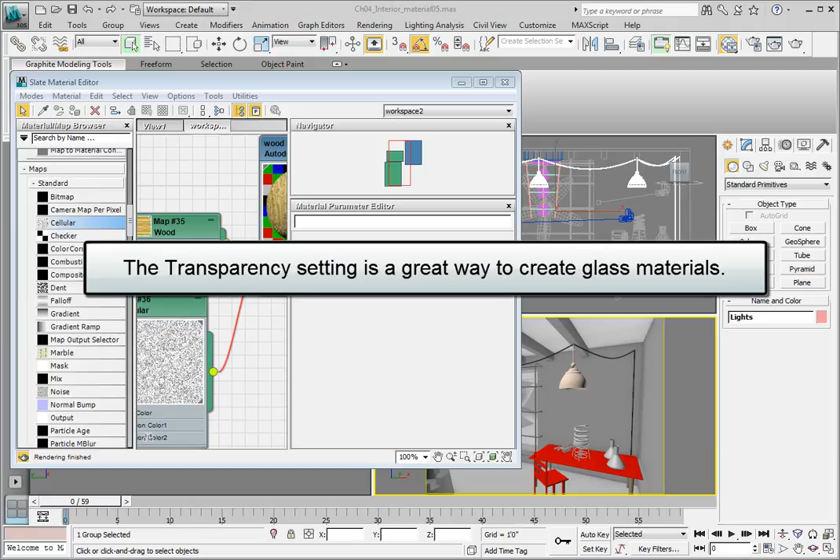Another important material attribute is transparency. The transparency of the material can be set to make objects ranging from flat planes of glass and thin glass materials like the beakers that we have in the scene to leaded crystal and colored solid glass objects.

If you're continuing from the previous section, then you don't need to do anything special. However, if you're starting from a new scene, go ahead and open the file Chapter 4 Interior Material 05, then open the Slate Material Editor to continue with this lesson. Let's go ahead and make some glass material for the glass beakers and the other glass objects that we have on the table on the right-hand side of our laboratory.

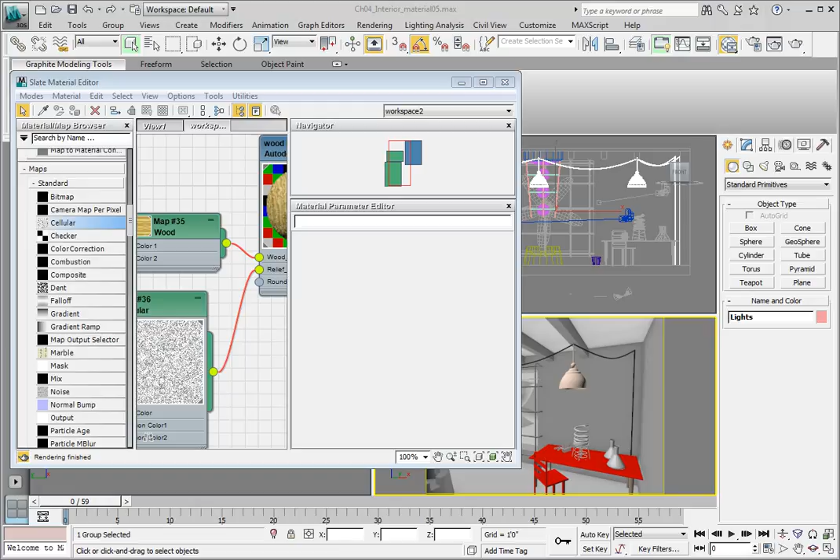In the Slate Material Editor, we have our active work area available. We can click the middle mouse button and pan the work area down so we give ourselves some room to add another material into the workspace. This is another unique aspect of the Slate Material Editor. Each workspace can contain multiple complete materials. You're not limited to just having a single material in the workspace.

Scroll down in the Material Map Browser until we get to the Arch and Design material in the Mental Ray rollout. Let's go ahead and click and drag that out onto an open area in the workspace. Double-click on the material title bar to expose the material attributes, and we can double-click on the material preview to give us a slightly larger preview.

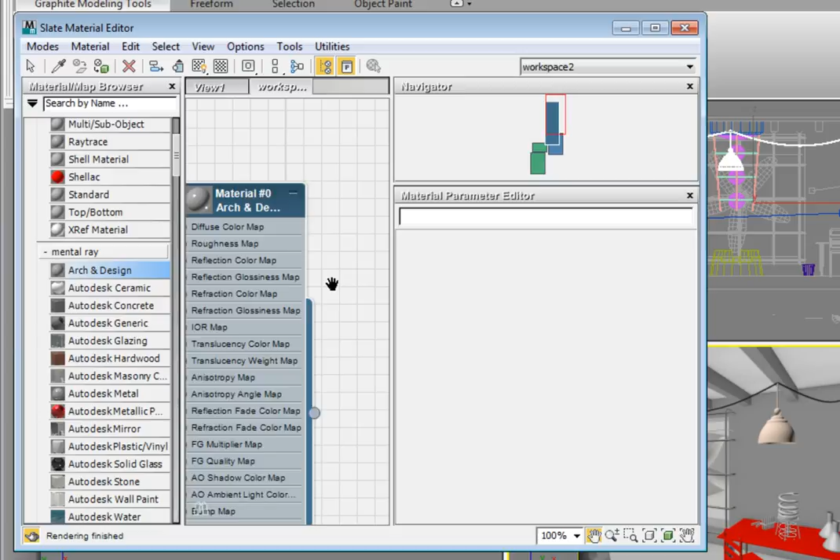Don't worry if you run into a situation where the material node is overlapping or on top of another material node. To arrange all of the nodes in our current workspace neatly, we can go up to the Slate Material Editor's toolbar and click the Layout All vertical button. This will rearrange our workspace and clean it up a little bit. Yours may look slightly different than mine depending on where everything is positioned when you click the Layout button.

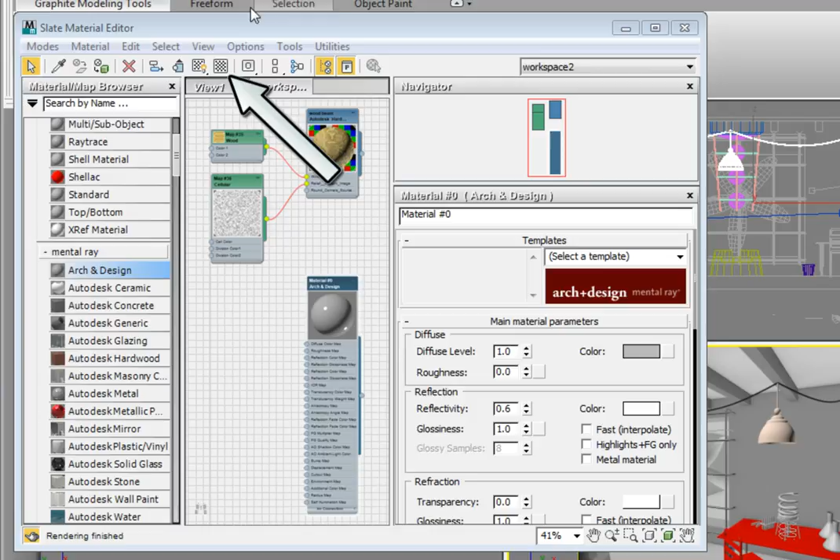Let's go ahead and turn on the Show Background in Preview button in the toolbar. In the material attributes for this Arch and Design material, enter the name glass_green and press Enter on the keyboard. And this time, instead of setting the parameters manually, we're going to choose a template from the drop-down list.

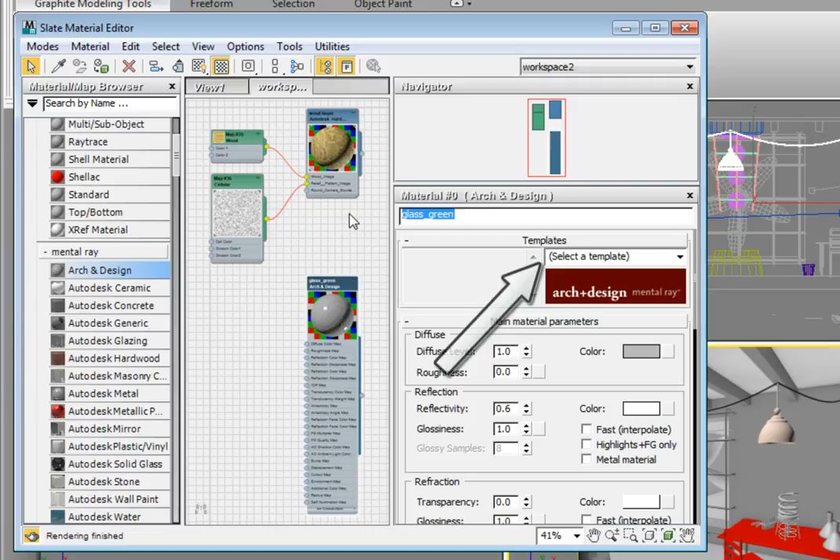You always want to be a little bit careful when you use the templates because you're not always 100% sure what parameters they're changing. It's important to learn the Arch and Design material fairly well before you start relying on using templates for your material. However, they do come in very handy in a pinch.

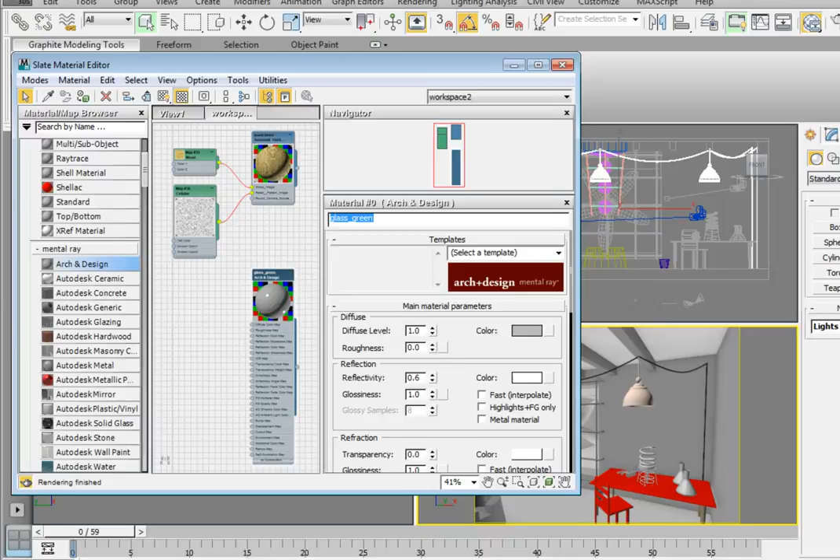Let's assign the material to our glass objects in the scene first. On the main toolbar, click the down arrow next to the named selection set. From the drop-down list, choose Glassware. This will select all of the glassware objects in the scene. In the Material Editor, make sure you select our glass material, then click the Assign Material to Selection button from the Material Editor toolbar. Now these objects all have the new glass material that we've just created associated with them.

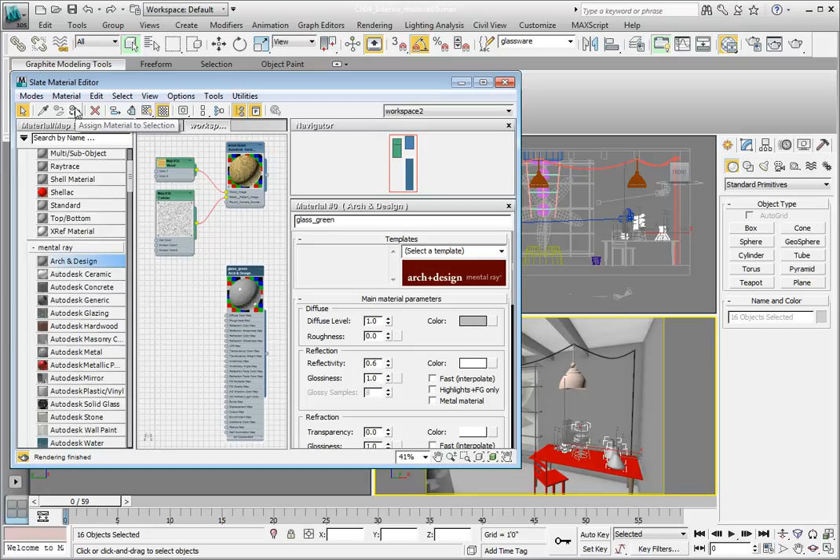In the template rollout, you'll see that we have a drop-down list called Select a Template. Click on the down arrow to open the list and scroll down until you find the template option for Glass Thin Geometry. The geometry in this scene for our glass is only a single polygon thick, which is why we're using the thin geometry option for the glass template; solid geometry would mean it had both a front face and a back face, creating thickness. For example, a sphere would be an object that you would use the solid geometry option for. Click on Glass Thin Geometry to select the template.

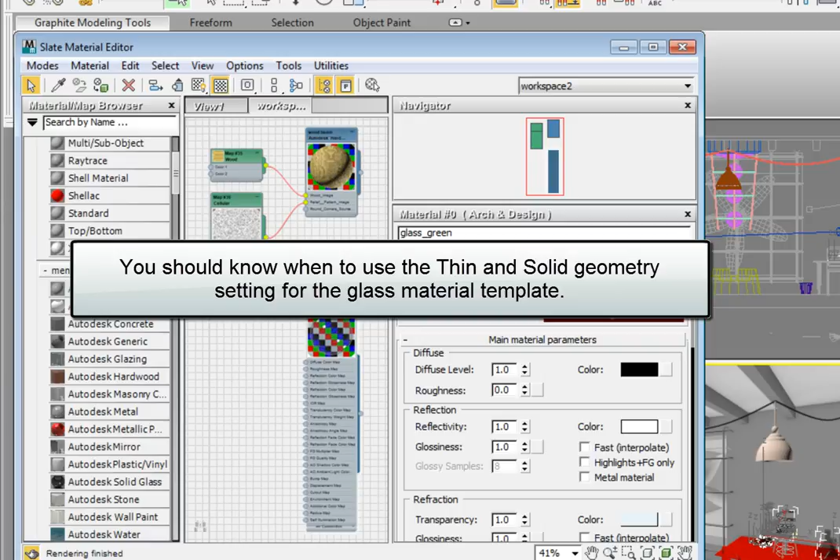This sets the color value, this sets the reflection, it sets the refraction, the transparency, it adjusts the shininess value, it also adjusts the reflectivity value. If we look, the shininess and reflectivity values are all the way up to 1. And if we look at our sample preview window, we can see in fact that it looks like glass.

One advantage of having the background pattern turned on for our material preview is that it allows us to see transparency much better. Now, because we used the template, it doesn't mean that we can't make some adjustments to the material. The template is also a way of setting a starting point for your material. Let's say you want to change this glass to be slightly green.

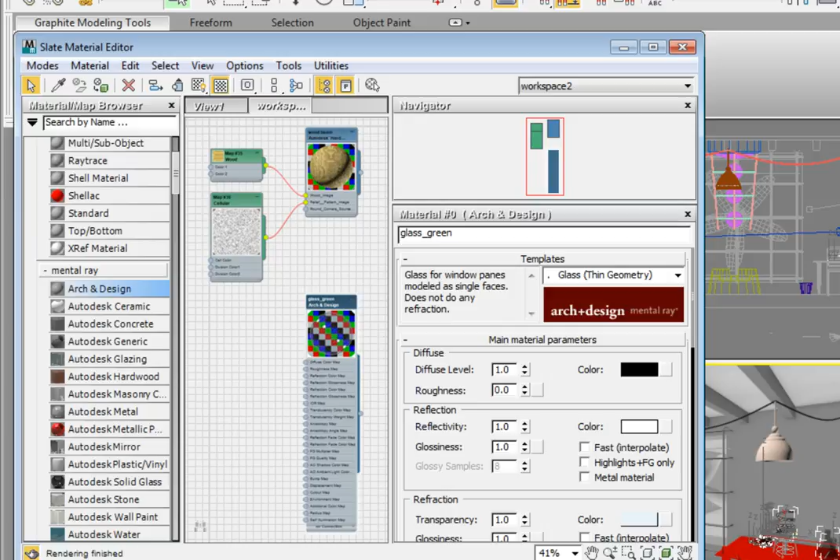Rather than using a blue color in the refraction color, we want to select the color swatch, in the color selector dialog, adjust the hue and slide it over to the left until we get to a green section of the hue slider. The value may be somewhere around 0.3. Then we'll drag the saturation slider to the right to give us a more saturated green color, then click OK. This has the effect of adding a green color into our glass. You'll notice that we have a slightly more green look to the material than we had before.

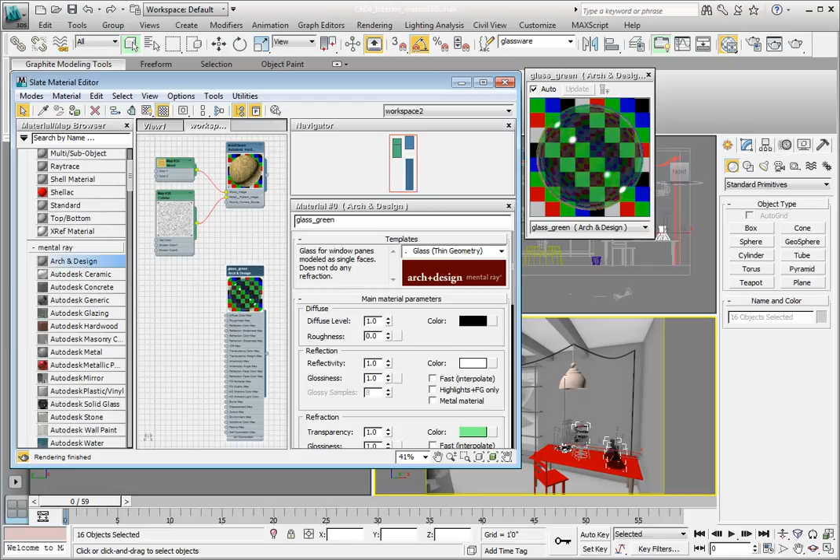Go ahead and render the Camera 2 view by clicking on the Render button from the main toolbar. What we've done by using that template has changed a variety of parameters in our material. It has changed the color value, it has changed the shininess, and we've gone in and made some modifications to the transparency color of the material so that it behaves fairly realistically.

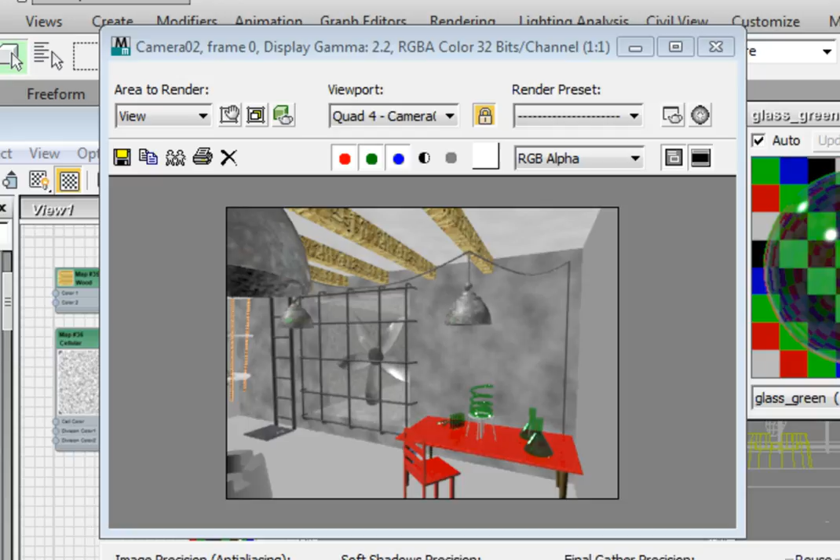Notice that it takes a bit longer to render the glass. Once the rendering is complete, you'll see that we have our green glass objects rendered in the scene. The transparency is another example of a shader that, in this case, was handled by the template that we chose.

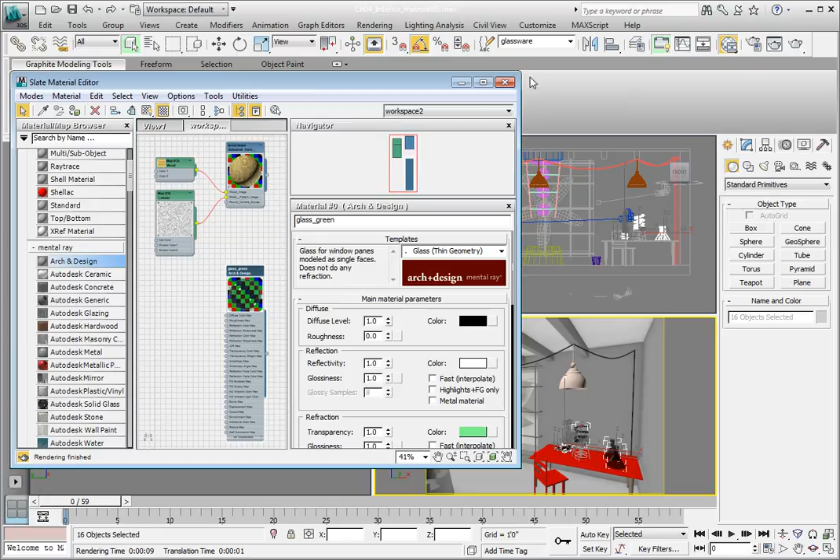Press Ctrl S to save the file, and go ahead and close all of the windows and dialogs that are open. Go ahead and press Ctrl S one more time. Let me tell you, you can't press Ctrl S enough times while you're working. Let's increment this file again. From the Application menu, click Save As. Click the Increment button to save this file as a new file.